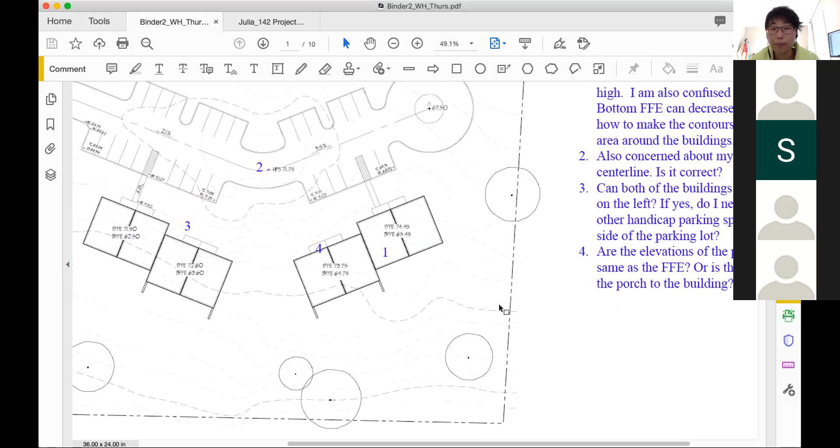Concerned that FFEs are too high, confused how bottom FFE. So yes, bottom FFE can decrease so much because you are going to use a retaining wall, right? I'm going to show here for everybody how the retaining wall works. I'll just use your numbers here, okay? Because some of them, yes, are a little too high and need adjustment, but let's just use that as a starting point. So in terms of the use of the retaining walls, you have a BFFE 65.45 here,

which means the elevation of this line is 65.45, and your next contour below is 65, right? So for all of our backyards, you need to maintain at least a 2% slope. So the 65 contour would be about 22.5 feet away. If we measure that distance, we will have 65 somewhere here. So that's your 65 contour there. And our original contour of 65 is this one. So that basically means we need to move that one up.

Now, of course, we don't have to use a retaining wall to move that one up, but if we don't want to move the whole length of the 65 contour, what we do is we add a retaining wall here, okay? And then we could simply only modify the last little bit of the 65 contour just so that water flows away from the retaining wall and doesn't drain onto the wall. Only modify where it attaches the wall. All the other contours would just attach the wall like this. So that is how you get through the 9-foot elevation change with a wall.

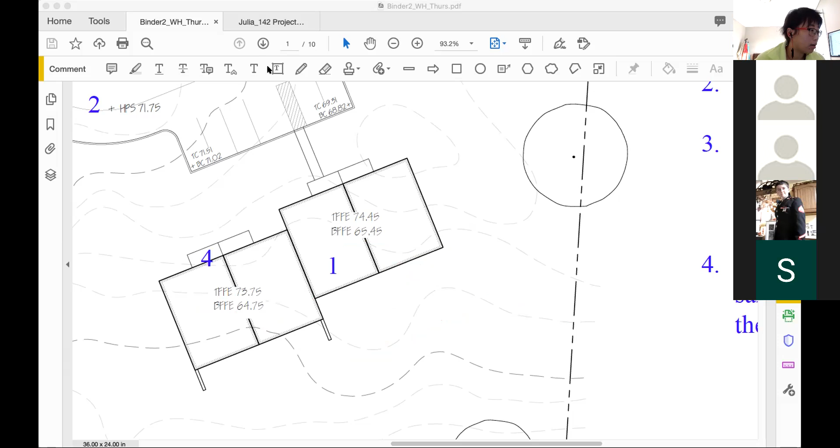So for this one, you would need to attach 66 to the wall for sure because the entire patio is less than 66. Without a wall, you wouldn't be able to attach that. Okay, so this is only if we're putting a patio on that unit. Yeah. Okay, got it, thank you. So that's how you work with the wall and the 9-foot difference. Let me zoom back out.

So, concern about your HPS. For your parking lot, there's really no HPS there because your parking lot has a crown. It doesn't have a swale. So this is not an HPS, it is basically just an HP. Your parking lot contours: I would recommend you go back to Tuesday's breakout room recording, the last item on the last module, weeks 12 to 16. So basically your contour pattern for a parking lot will look like that. That is your high point, and your slope goes like this, as you have calculated already.

Next question is, can both of the buildings with ramps be on the left? Definitely, and that's totally optional, up to you. Yes, feel free to move the painting. Basically, this is painting on the parking lot to indicate where the ADA parking spot is. So feel free to move it wherever you want it to be.

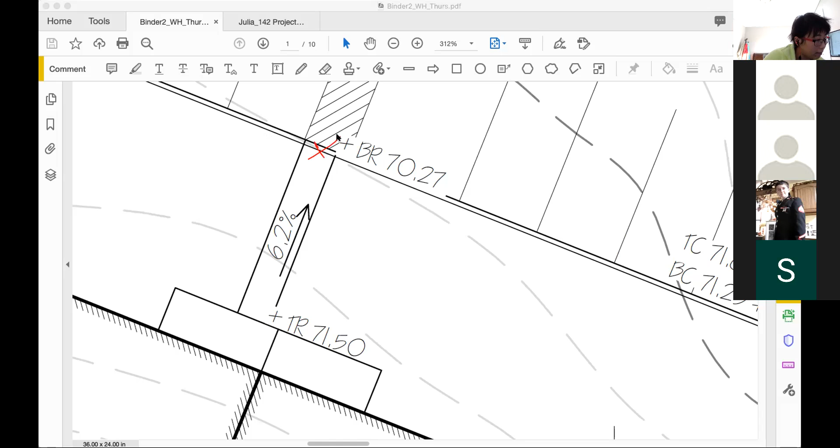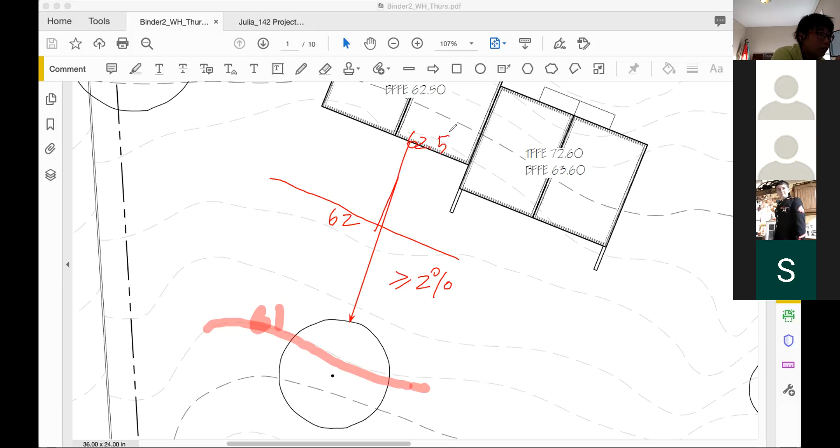Okay, so how do we check if your bottom FFE can work? So this one is 61 and it cannot be moved, right? And our goal is to maintain the whole slope above 2%. So basically this means about 50 feet away, it would be 62, and about 75 feet away, it would be about 62.5. So as long as the distance here does not exceed 75, then this option would work.

Okay, so for that one, your TFFE and BFFE could work, but as we explained how to use the retaining wall, the wall would need to be extended pretty long for your 62 to be attached up here. Does that kind of make sense? Yes, that makes sense. Thank you. Cool. So that's that set.

So I think the next step for you would be to work on the parking lot contours, figure out the V-shape, the angles, and where they hit the curbs. And wherever you have steps, you need to indicate that and calculate the walkway slope.

And actually for everyone, I would recommend having a sidewalk that connects all the way, instead of only one walkway to each unit. For instance, if I'm a visitor and I can't see the unit number on the door, and I walk here and find, oh, this is not the one that I want, I don't have to go back to the parking lot and then find the next unit, right? So for everyone, I would recommend having a connection between all the units, okay?

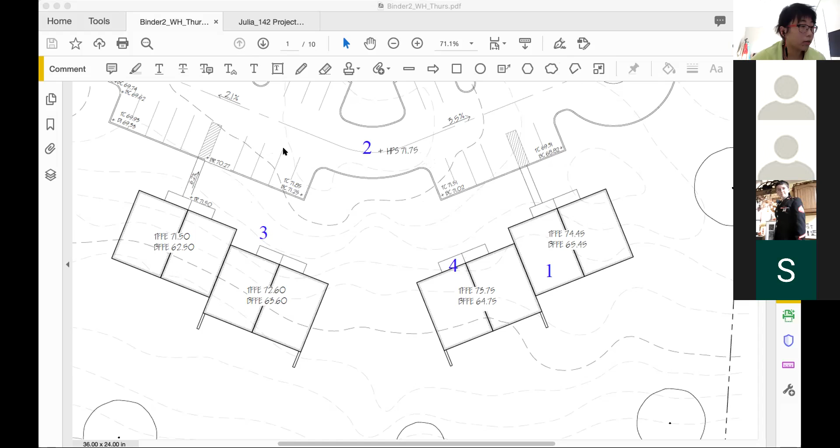Okay, let me try to go back to your list of questions. Anything else that you want to discuss here, Grace? I think that's fine for now. Like you said, I think I'm gonna listen to the other ones and look at the contours, but that was really helpful. I mostly was just concerned about those FFEs and how they worked. So that cleared that up for me.

So thank you. Awesome, cool. Alrighty, we'll move forward then. Thank you. You're welcome. Next one. I have my list on the other screen, so I need to pull it up. So I have Dana. Yes, I'm here. Hi.

So I know my questions are pretty generic. FFE is okay. Draw the proposed contours versus. So you have a 2%.

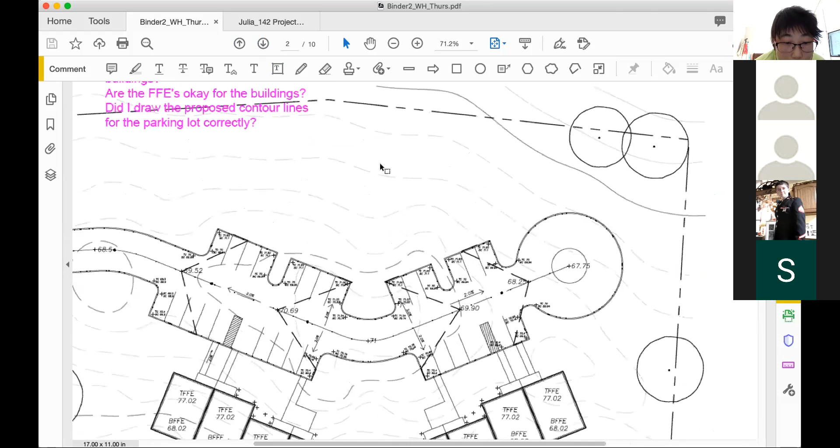Oh, okay. So you have a 2% slope for both your center line and your side slope, which means I think this line is correct. Okay, that one is correct. Different color, please. That looks like it's correct, because when you have the same centerline slope and side slope, you would have a 45-degree contour there.

Okay. So the bottom one does not look correct, because that's definitely less than 45. So be sure to check that. You should be able to mirror the other line if the other one is correct. Now mirror that one to get the next one. There are multiple ways. So I'm basically mirroring what I did on one side to the other side. So first you need to check whether that's 45 degrees. If that is 45 degrees, then you can mirror it.

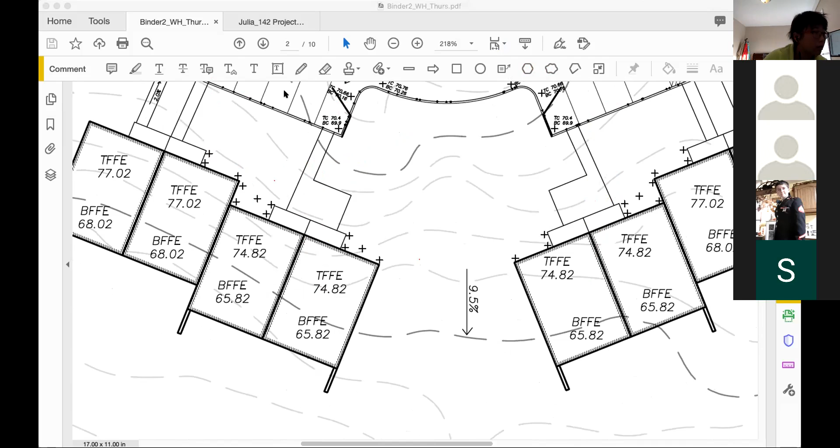So I know you want to check the FFEs, so let's take a look there. Because I was looking at other people's FFEs, and I'm not sure whether my numbers are too high or if I'm even doing it correctly. Yeah, some of them are too high. Because there is a limit of how many steps you can put in front of an apartment building, right? And there's a limit for the slope for the walkway. The walkway will be below 5% if it's not a ramp.

And the steps, the rule of thumb is not to put above 4 steps right in front of your porch for a residential building. But you can break it down to 2 or 3 steps a group, a flight, so that it doesn't seem a really steep entrance for the residential building. On the other hand, in many of these cases, you don't have to raise the FFE that high, right? So for instance, if we just take the number here, assume that this is correct. The 45 degrees seems to be correct there.

So I would say the top of the curb here is about 71. Is this 70? Yeah, 70 and 69. Or is that off? Let's see. I think you're probably missing 76. I am not quite sure if those are the contours because they kind of conflict with your spots there. So this is 71. That's 67.75. That may be 68. That may be 69. Still not correct. I think I may need to eyeball it.

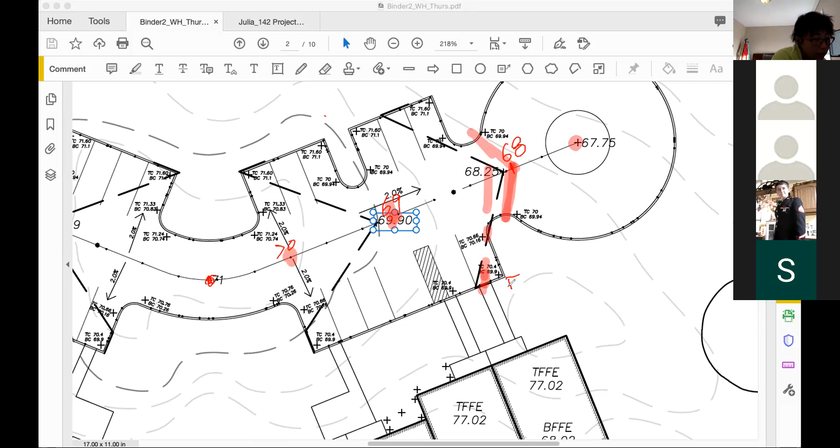So if that is the 68, this might be about 68.2. So if the BC here is about 68.2, and TC is 68.7, then what we do is we try to use 5% slope. And I remember this being about 17 feet away, so let's use 15 as an estimate. So the TFFE, without any steps, would only be 69 point something, which is not enough. But you can see without any steps, I can get to about 69.5 there. Right? So that is 8 feet difference.

You will need 16 steps, which is too many, not necessary. But would 69.5 work? Not really, because we have trees there. So 69.5 doesn't work either, meaning definitely we will need steps. But how low can we get there? So I want to keep some of the notes on the side for reference, but I'll erase some of them here. What we want to try to keep is this, right? And that is 63. So I need to keep 63, but I can move 64, right? I want to keep 2% in this back area.

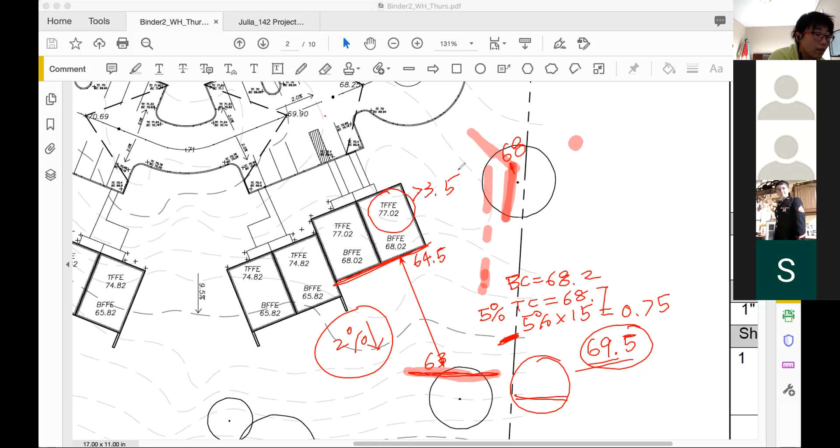Right. So for the front, I would want to aim for that. And if the difference, without any steps, is about 4 feet, then you would need about 8 steps there. That's a lot of steps. So the one thing is to measure the specific distance here and try to get this number as high as possible.

And the next one is, if you do need to put in 6 steps or more, break it down into multiple flights, and then it may not seem as steep. Yeah, so that's for this pair. I'll quickly go through a few others.

So the same thing: pick one of them between these two pairs to be ADA accessible without any steps, which means you would calculate the TC here or there. Measure the distance there and use a 5% slope to calculate what the TFFE is. Likely either one of these pairs would work without any steps, but you can calculate both to find out which one is easier.

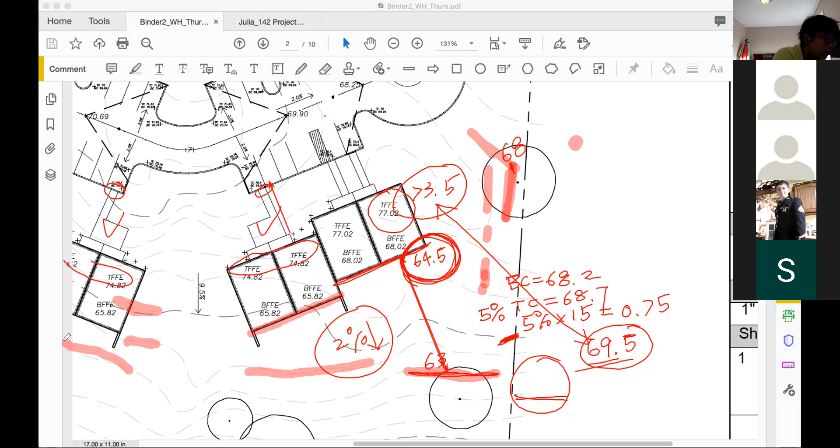And how do we evaluate that? For this unit, this is 64, so I'm trying to get this elevation at about 65. And for that one, this is 64 and that's 65, so I'm actually trying to get to 63 point something, or 64 would work, meaning that one can be lower than this one. So this is easier. The left one is easier to make ADA, so maybe you pick this one. I'm confident both will work, but you only need to make one of them work.

Let me try to clear this one and move to the left. The left one, again, is too high, but your goal is to try to get the bottom to around 64, because that's your 63. If you can get it around 64, then you don't have to move many of the contours. And for the front, you're aiming for 73, then you calculate the TC here, do a 5% slope, and then figure out how many steps you would need.

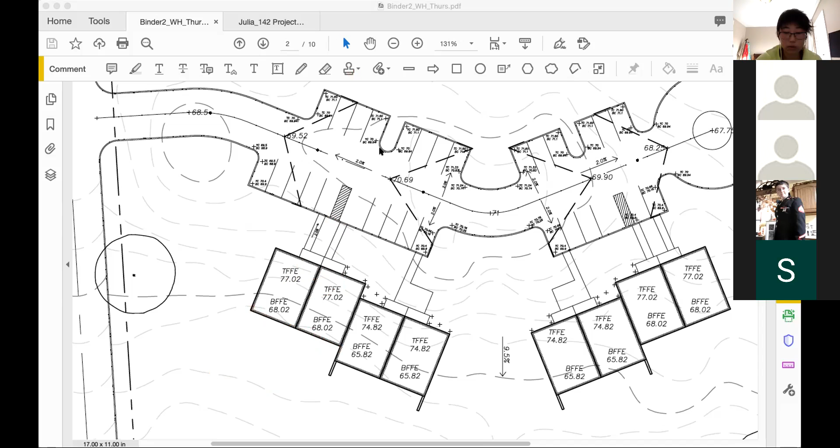Let's zoom out to the questions. Once we figure out the FFEs, one key thing to remember is that the contours keep going. I'm only drawing conceptually because I'm not sure if you would have a 67 there. You may not; that depends on your slope. But remember, they don't just stop here. They keep going. And then we would have two DIs there.

The importance of those contours is that they determine where the contours should be connected at the curb, right? So, for instance, if this one is 70, your 70 would come out here and do something like that. So those determine how you connect other contours beyond just those in your parking lot. Next step, you will need to figure out these connection points for your other contours, and I would recommend working on the front of the building first, then the sides, and then this area.

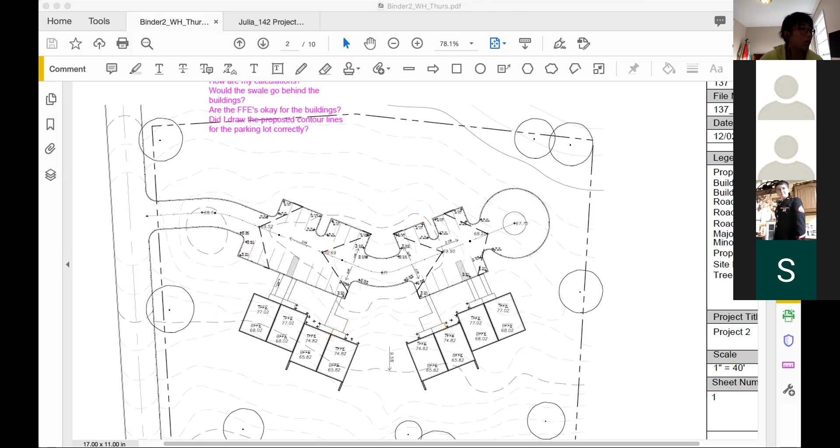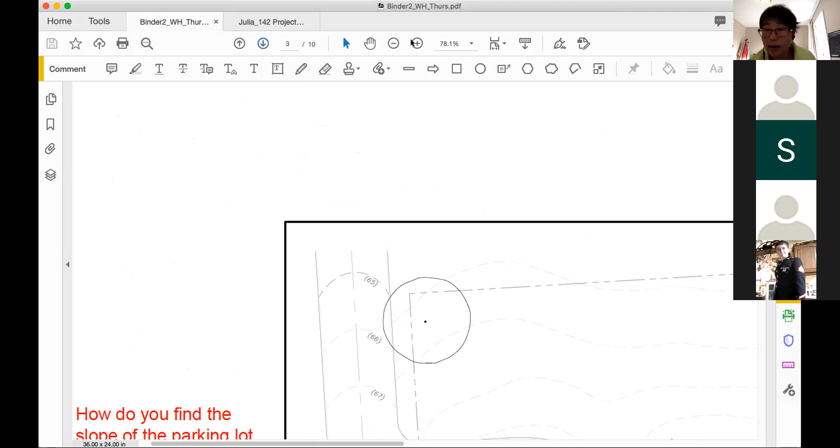Alrighty, we'll keep moving forward then. Next, remind me who I have. This is mine. Hi, Sophia. Pretty good on time then.

So the slope of the parking lot, you determine it, right? Because you are given two spots here and there, and you determine at what slope you want to go up and then go down. The slope goes that way because we're taking advantage of the original topography, where you have the highest point in the center. So you could predefine that as 2% and then use this one and this one to calculate the next one. Oh, okay.

So I think my biggest concern right now is I'm struggling with the FFE of the buildings. I didn't realize that each building should be the same. I was doing each unit differently, so I have to fix that. But are we determining the FFE based off the existing contours and where it should be, or are we going from the parking lot and working down?

Yeah, you need to go from the parking lot. Okay, so then I need to fix mine, because there's supposed to be a 9 feet drop between the top FFE and the bottom FFE. Yes. Okay, because I was worried that it was just a very big difference.

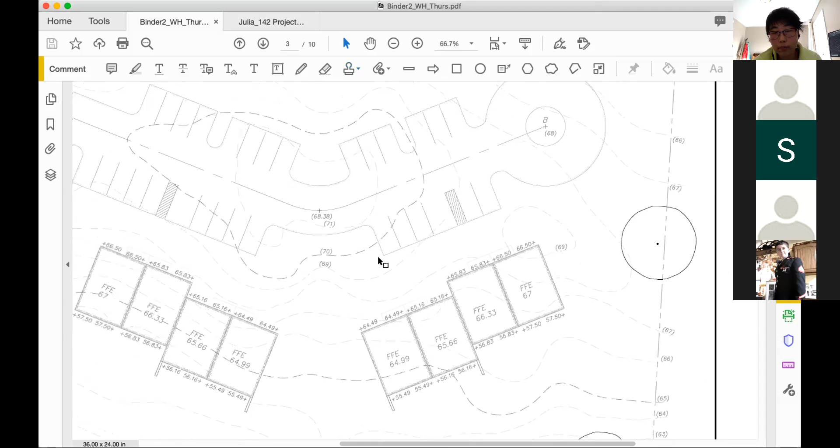So work on the contour draft and then calculate all the tangent points, the spots on your parking lot. Okay, so once I'm done with the contour, is that where I would start the spots, all the way on the left by point A? So your workflow would be: first determine the centerline slope, working from A to the right. Do not start with B, because this side will need to be steeper. It's a shorter distance.

So start from A, specify a centerline slope, calculate that slope, and then work on the parking lot's contours, what these contours look like. Then work on those spots using the contours you just drew. Then calculate these walkways corresponding to the yard elevations to check every set of BFFE and TFFE works, and mark your walkway slope and how many steps you need for each set, so that you know I do have 2 units that have ADA access, I do have walkouts.

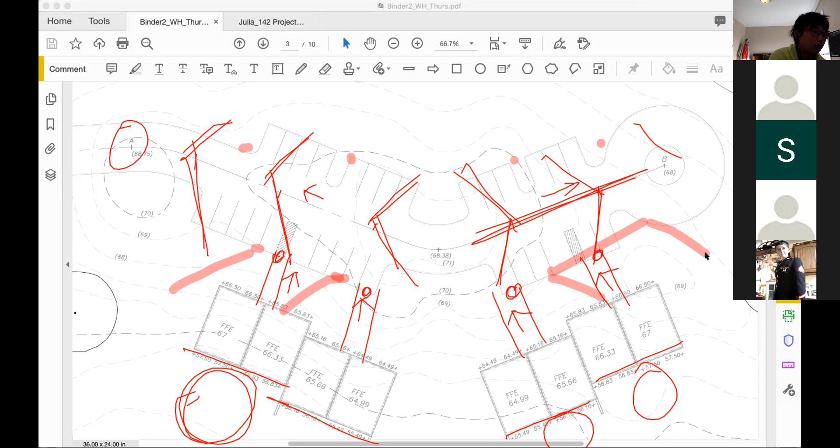Then go back to the contours. Where do they come out of the curb? Then start working on the other contours. How do they connect? Do I need a swale here or there? And then I think it's a good idea to work on spots for your retaining wall first.

And the last thing you do is calculate the curb spots. Every tangent point needs a spot, and that can wait until you finalize your contours. It's kind of independent of other things; it's only related to your parking lot contour. So whenever you feel really tired but have some time, you can work on that, because it's a very repetitive process. Okay. All right. Perfect.

Thank you so much. Yeah, this kind of applies to everybody. All right. Sounds good. And we'll move forward then.

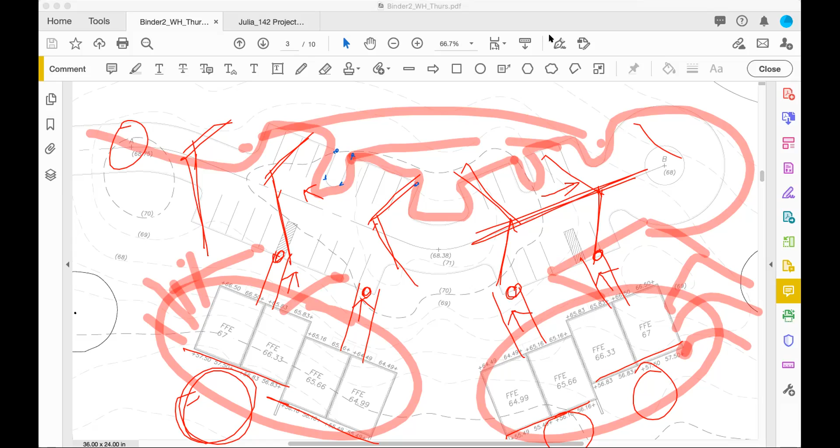Next we have Prahalad. You here? Hello. Hey, how are you? I'm doing all right. Doing all right.

Good to hear. I had some serious concerns about my main swale. Your main swale, meaning the one in front of your building? Correct. It's atrocious, and it's also very wrong. But I was just confused on how to do it, so I thought I'd just talk through it with you. Yeah, yeah. And then the other one I was really befuddled about was the wall that we talked about during the last review. Okay.

Seems like your TFFEs and BFFEs are mostly going to work. I'm a little confused on which one is ADA accessible. They seem pretty high. Okay, I should have labeled it. The one that is ADA accessible is supposed to be the one on the far left, but does that mean that the bottom floor FFE needs to be the same as the top floor FFE or something like that? No, I'm a little concerned that this is a little too high. You might not be able to do ADA accessibility there for the far left one. In terms of the percent grade?

No. So if I do a quick estimation, this is about 70.25 or something. So okay. Now the BC here would be 70.25. So the TC here would be 70.75. And this is about 25 feet, so we use 25, then 5%, you get 1.25. So the highest that you can get here would be 72. So I think you still need one step there. And you can do the calculation again, but I think it is safe to say that this is a little too high here. Okay.

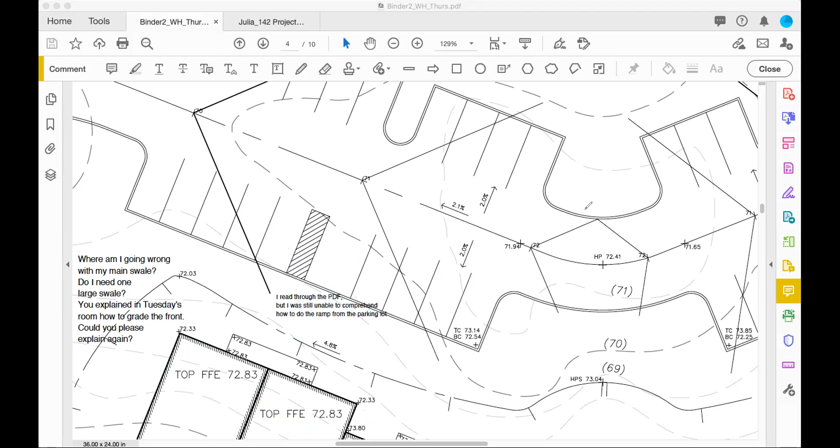And if it is 72, you have to get 63, which still can work, but 61 here, sorry, I'm just trying to go 61, 62, you have 63.33, so that still might work. When you say might work, what would be the problem with it? Is it because I'd have to change the landform there, or something else? So you have to maintain 61 here, right? Yes. And we calculated that the front without any steps is about 72. So the bottom is 63 there. In order to not move 61, if this is 100 feet, then we're not moving 61. But if this is larger than 100 feet, then you have a slope that's less than 2%, then that's an issue.

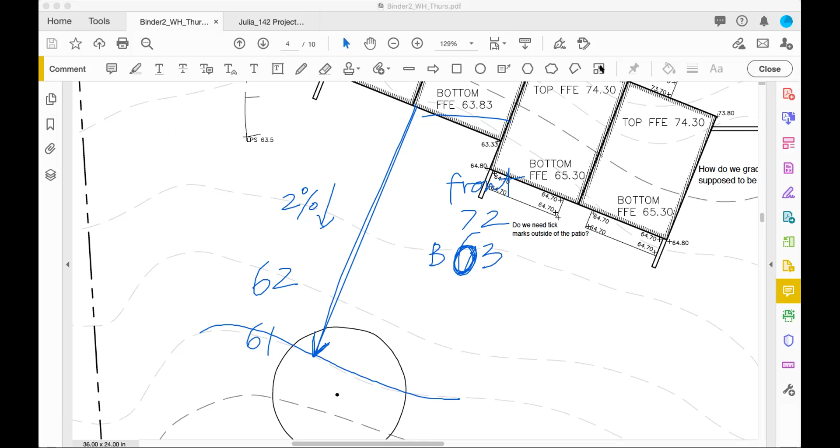Let me quickly measure if that's actually larger than 100 feet. So distance from this one to the unit here, it's 70. So if it's 70 feet, then you would be able to have a bottom FFE at 63. So you can still make this work, but you'll end up with a long wall. That kind of make sense? With a long retaining wall on the side of it. Yes. Okay. So in order to make this ADA accessible, you need to do some fine calculation about the front walkway, make it at maximum 5% slope, and then get a sense of how your TFFE turns out.

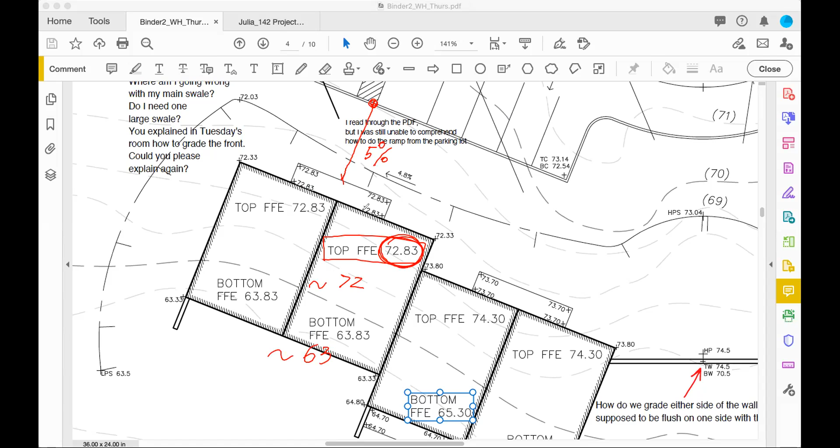Okay, so let me go through that once again. You need to calculate the TC here at 5% slope. Then you would know my top FFE, the more precise number. My suspicion is that it will be below this, but not too much. I think it will be around 72. So your bottom would be around 63. Now, if the bottom is about 63, what you need to do is measure.

So we need to keep 61 in place, right? Then we measure 50 feet here. That is our 62 modified. That's our 62 contour. And this is at a 2% grade, because this area needs to drain. All right. So then that means this whole area would be slightly above 62, right? Right. I'm sorry, this might sound like a dumb question, but why would I need to regrade the landform there? Because otherwise you're keeping 61. The 62 cannot be here.

Let's measure. I'm sorry. Like, I understand that I need to maintain the 61 contour. 50 feet. Okay. So I'm measuring. Okay, that's 50 feet. Sorry, I take it back. I need to wake up also this morning. Not this way, the other way around.

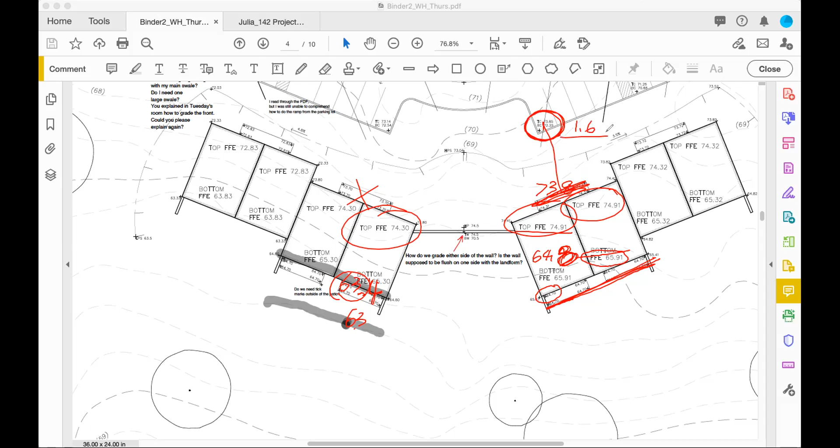I'm a little skeptical with this. It seems that you added 1.6 to your TC. I think there's an error here as well, because you wouldn't get so much. Instead of adding 0.6, I must have screwed up there. Okay, I gotta go back. Yeah, you actually add 0.5. It's 6 inches, but it's half a foot. Right. So check one more time for all these numbers. I think you know the process. It's just a matter of double checking your previous calculations were correct.

Okay. Let's try to hit the swale issue. Last class session, I explained to the class in my group there are 3 options for grading your building. The first option is the easiest option. I'm drawing conceptually, okay? I know that these contours kind of connect from midway along the curb.

So for instance, the 70 would go like this. And the first option is for all the water from the building to drain to the parking lot. Right, and okay. So your wall would be there actually, connecting the, otherwise it's hard to drain that corner, okay? So this is the first option.

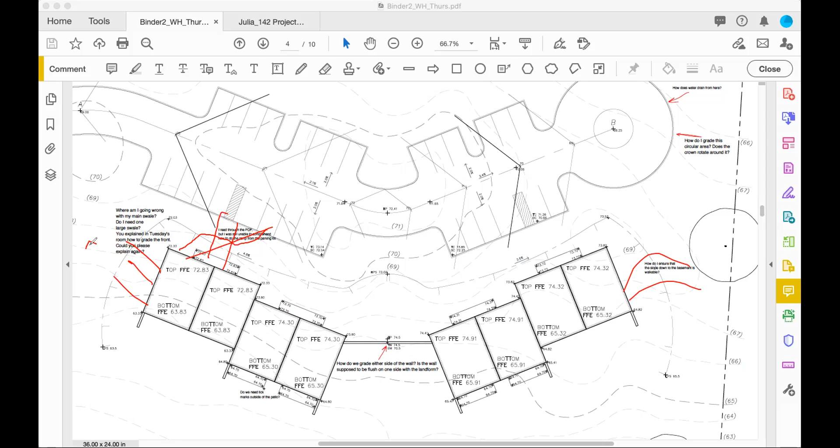And then the second thing is likely you'll need a swale here, but not here. Likely you'll be able to drain the water here with just sheet flow, and yes, you will need a swale here because of the number of contours that you need to adjust here, and also the original direction of this contour there. It's hard. You can't just turn them away like this. You don't have that length of the wall to work with. So those are the 3 difficulties for the first option. Okay. All right.

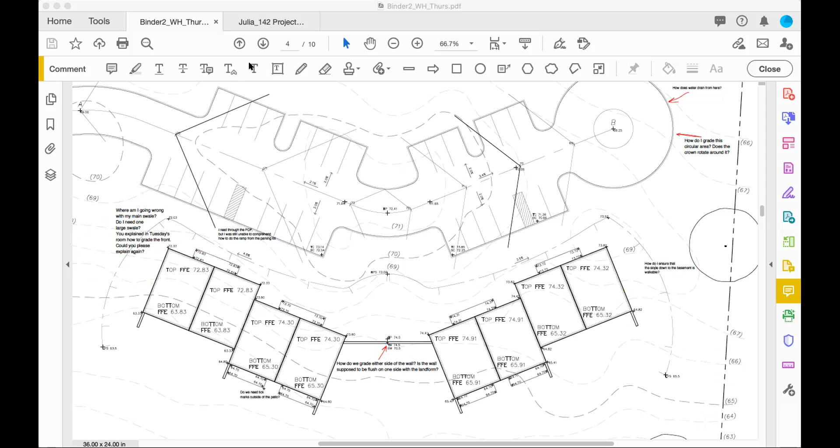I see you have a few additional ones. I'll go very quickly. Sorry. Thank you so much for going in depth. Oh, no worries. This will benefit everybody, and I believe we have about a couple minutes here.

So how do we grade? You continue. The shape of this should not affect how you grade that. Pretend that there's no shape and just keep going. And that circle just represents that we should put a drainage inlet there? Yes, you should. So we keep the contour pattern going, and the lowest point here would be our DI. You need to find wherever the furthest distance is, and those 2 spots are the lowest points where the water will eventually collect. So those are the DIs.

And don't forget that you need to grade the road on that side too. But basically, that's just 2 contours or 1 contour depending on your elevation. Can you scroll over to that side? Because I swear I had put in some crowns on that side. Oh yeah, you got it. So I still need to regrade that, or? Well, if you made sure this is correct, then right.

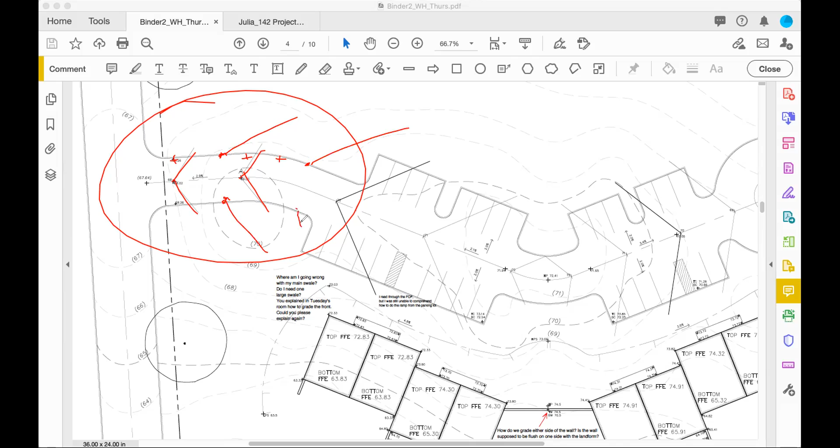And then finally, just one last thing I had a question about. I think it was on the other side of the document. Oh no, actually, it was at the bottom. With the patio, do we need to put some tick marks? You don't, unless you have steps or walls around the patio. Otherwise, this is the same. These two spots are the same.

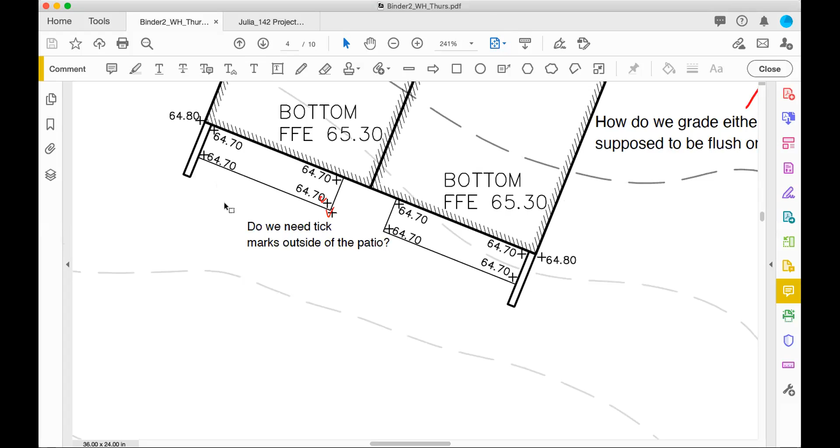Okay. Sorry, that was just the last thing. Thank you so much. No worries. And if there's any extra time at the end, I probably have a couple more questions. Sure, that's totally fine. Do I look like I'm on track to finish this by Sunday? Depends on how much time you can put in. All right, thank you. Keep powering through. Let me take a 1-minute break and I'll be right back. Need to get a sip of water. Okay.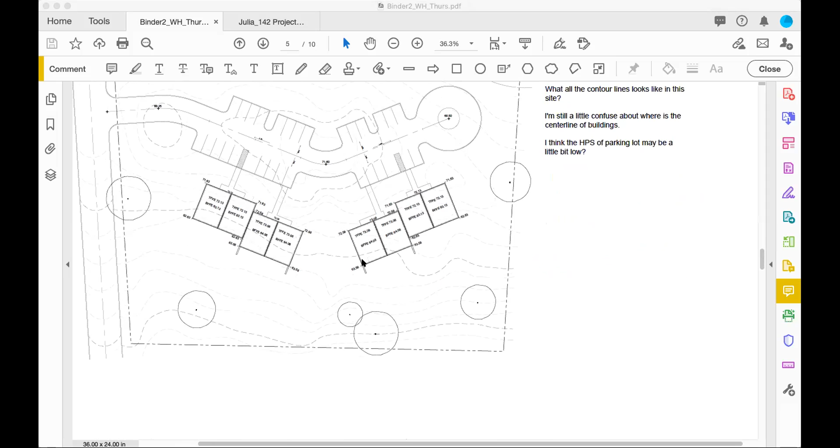So where should we start? I think we can go over the parking lot contours. Well, the parking lot contours is a crown. It's a V-shaped pattern to create the crown, right? So you may have viewed other people's critique and get a sense of it. Let me reactivate my pencil here. So basically, your parking lot contours will look like this. Of course, that's not the only way to grade it, especially for this one. But let's just go with that as a starting point.

I think your main question is probably related to what's the contour pattern here? Is that kind of where you're confused? Yeah, actually, after I finished watching the review before, I already got the answer because you guys gave a lot of examples of those contours, what it looks like. Awesome. Cool.

Yeah, so I do agree you can raise this up a little bit more to make it easier to create the ADA spots. Because with this high point, it's pretty hard to get to 73 and 72 and 73 here. Can you kind of see that? If I'm high here, then I will be higher at the spot, then I can get higher here, right? So yes, I know you started with a 2% slope, but raising that could make it easier for you to raise the top FFE of this unit.

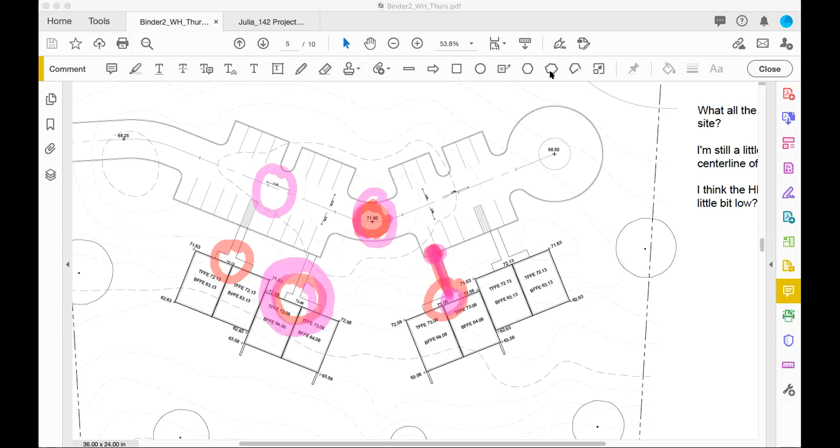I'm not suggesting that you have to do that, but one good check would be, sorry, let me zoom in here. So I don't see a spot marked up here. I'm not sure what the spot here is. One good check would be if this is 71. Let's suppose that that's 71. I could now estimate the top of the curb is likely around 71 as well. Then you need to measure the distance here. That's about 25 foot. I think it's 27 foot. If we use 25 and 5%, we know that you are able to get to 72.25 there without any steps.

So if this is 63 at the back, 5, 4, 3, this should still work for the back. So a good check like this would help you determine, do I need to modify this at all? It looks like it's fine if you don't modify it. So I would actually go with the current numbers that you have. But again, double check how many steps you need. What's the slope here? Is there a better solution? But don't spend too much time at this stage. Move forward to draw out your parking lot contours, to start the contour patterns in other areas.

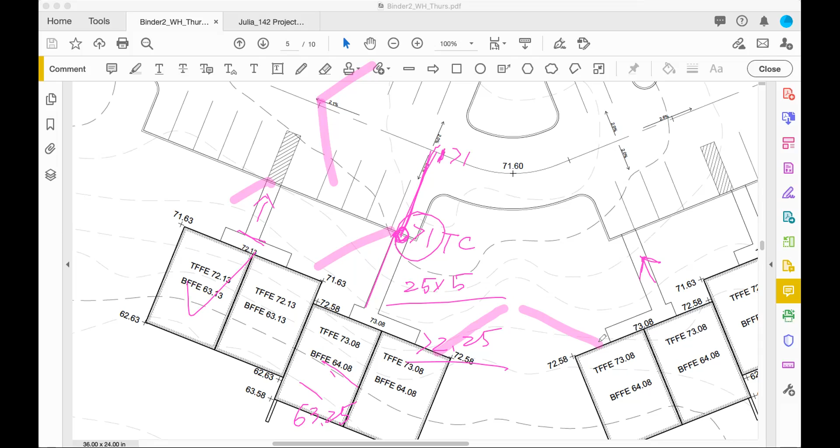It's more important to move forward to the next stage than to refine the TFFE and come up with the best solution. I would not give advice like that otherwise. If we were 4 weeks away, for instance, I would help you get a better set of FFE that will reduce the cut and fill. But I think at this stage, it's better to move forward with the other contours. Does that make sense?

Yeah, I will. Firstly, I just have to finish all the contour lines work and then maybe set the HPs of the center line of the parking lot higher, just to make sure that I have enough space to deal with the slope and the distance between the building and the parking lot site. Yeah. So what I was trying to get at is do one more verification based on your current HP. Calculate the TC here, and calculate without any steps what kind of TFFE you can get here, and make sure the bottom FFE would work with the contours at the back.

If that works, don't change it. Move forward. Move forward to sketching out the contours on the parking lot, and then calculate those spots, calculate the slopes, and calculate how many steps you might need for other units. And then once you verified every one of the units would work without moving the trees, without reducing your ADA or walkouts, if they work, move forward with the other contours.

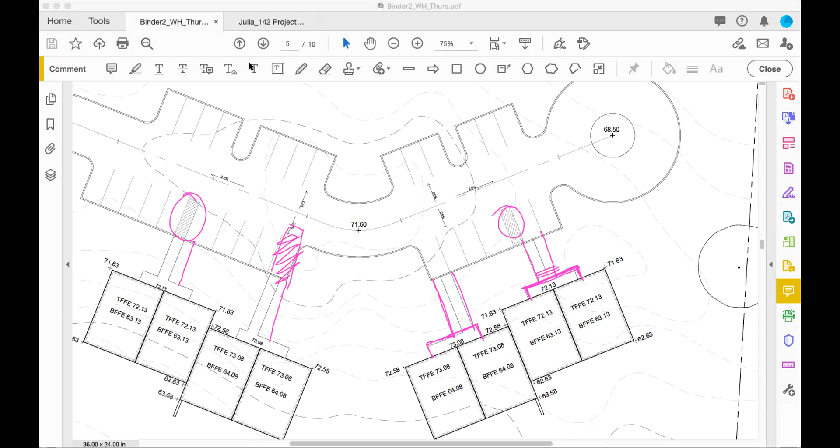Okay. What else? Let me zoom back out and see your list here. Okay, I think that's all for your current questions. If you come up with more, if we have time at the end, we can definitely talk more about this. Anything else that you want to touch? I know we have a couple more minutes here. I think just let me finish the review today, and then let's see if I still have some questions. Maybe we can talk. Sounds good. Thank you, Professor.

All right, and we have David next. How are you doing? Hey, hi. Pretty good. How about yourself? Can't complain too much. Awesome. You had all the questions answered then.

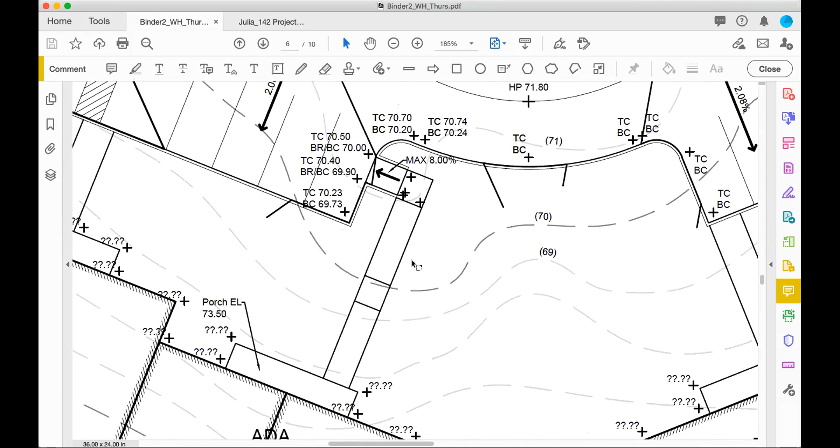I think the only one remaining would be that ADA curb break. Just want to make sure that roughly it's correct. All right. So if you have BR, oh, okay, I know why you had that. So the spots. So maximum 8% going up. 74. So that needs steps. Steps. ADA.

Is it mainly you would like to check all these spots for the BR? No, just graphically, is that how you do a curb break? Oh, graphically your current representation works. Your TR will be here. Sweet. In terms of design, as I suggested to other people, I think it is a better design if you have connections between every one of them.

I know we kind of missed the ADA lecture this semester. Usually we would have a separate week that's dedicated to ADA design. I hope we'll be able to bring that back next semester for the stormwater class. But the one key thing is that ADA is not just for ADA. ADA is for everybody. If you have a baby, you need to push a stroller, right? If you have heavy things that you need to unload, you also need a ramp. So whenever you can make the ADA accessible to everybody, that would be the better design.

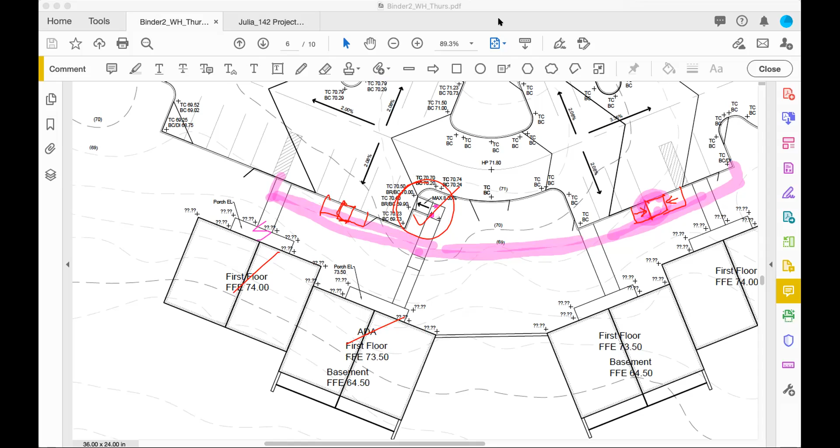And then the only other question that I have is, in lectures you supplied roughly how things would look graphically in AutoCAD, with spot elevations and such. Is that something you could supply for the curb breaks as well? Oh, graphically. That makes sense. Yeah, like in AutoCAD. There is one. Sure, I will look for a couple examples and I'll put them up on Canvas.

Sweet, thank you. But because you opted for basically one without any side slopes, for yours it is really just any contours that would run on that ramp, the slope arrow, and the TR and the BR. So for yours, once you add those TR there, you're good to go. Sweet. Sounds good. Thank you. Cool. Alrighty. That was quick.

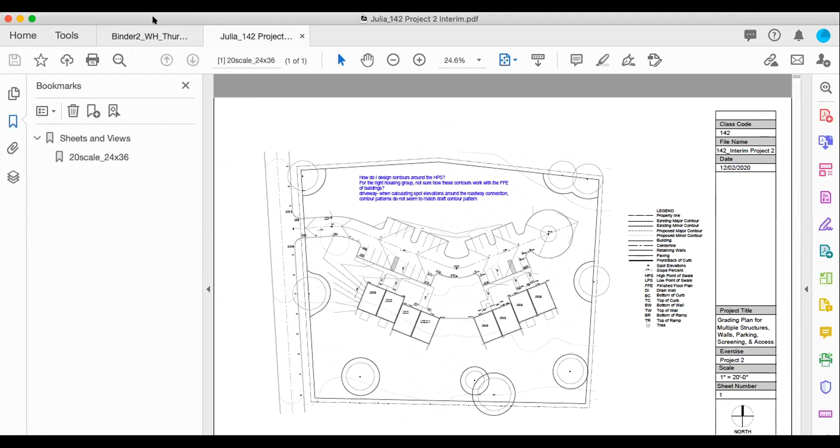Yes. Okay. How do I design the contours around the HPS? I'm not sure, for the right housing group, how these contours work with the FFEs, driveway, calculating spots around the road connection. Yeah, you don't need to include that one. Stuart included an example. So basically you're doing something like this. But you don't need to provide any fine grading for that area for this year. Next semester we may bring that back, but not for now.

So can you explain a little bit more what you meant about around the HPS? Do you mean this area he was talking about on Tuesday? Yeah. Looks to me that's correct. Okay. Yeah, you're basically having a very small summit signature there, which is correct. Yeah. So next one is about contours.

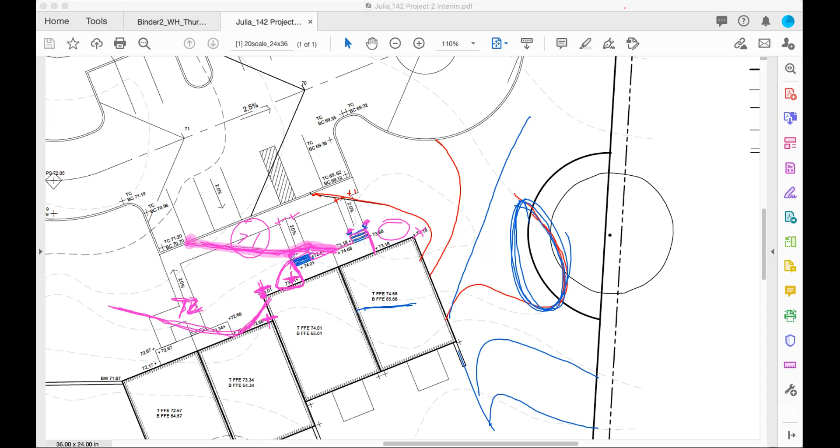So for instance, this one will be above 72. That one will be slightly below 72. And that one would be below 72. The 71 point, no, it would be higher than this general area. So 71.3 or 4, all would be pretty reasonable estimates for those areas. Okay. Yeah, great question for that area.

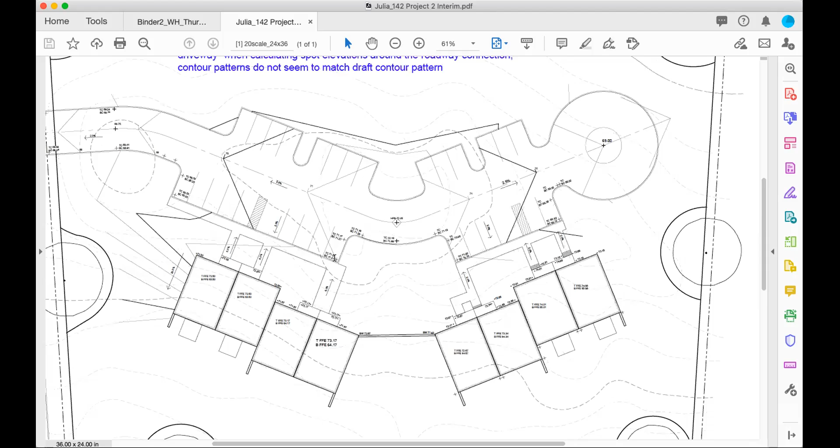Take a look at the other things. I think we hit those questions there. So for this side, I think what we can do is something like this. Once you calculated these spots and determine where this contour will fall, now it depends on whether or not it falls on this wall or that wall. Basically I'm trying to say it could hit the front of the building, but that would be dependent on once you calculated the walkway spots there.

Okay. It is even possible, if that connection is correct, that you can turn that to make this area a little steeper. That's fine. If you want to create some more room for the side, you can see if I have that contour hit this wall instead, I would have a little more room to attach all the other contours. Okay, so that's some flexibility at that corner.

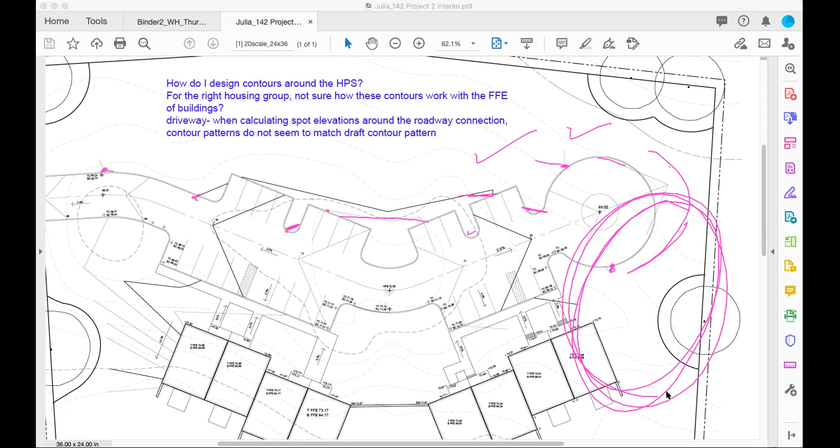Well, let's use the rest of the time to go over how to do this area. So the first thing you need to do is to know the TC and the BC at the end of the lowest point here. What's the curb elevation around that? So that's 68. The BC would be a little higher than 68, right? Let's say 68.2 maybe. And the TC here would be 68.7, which means your next contour out of the curb.

So if we're drawing this, we're going down, right? We're going down, and my BC here is 68.2. And then I have a curb that is 0.5. So my TC here is 68.7 there. So I would have a contour that is 68. My next contour here would be 68, somewhere here.

I'm actually, yeah, I'm only drawing, it's actually like this. I'm running out of space, but I have a 68 somewhere. I'm exaggerating the slope here. Sorry, is that kind of clear? I know that might be confusing. I'm exaggerating the slope in this area to show that my next contour is actually 68 somewhere here. Or maybe it's better that I redraw it. Okay, let's redo it.

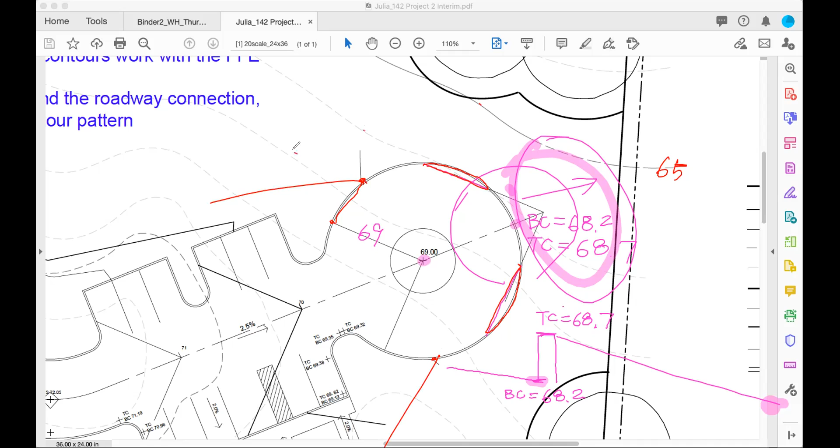68 is actually up. Okay, so it has to attach the wall. This one is 65. So I have a 69 here, 9 here. That connects back there. 9 connects to the building in this area. I have a 69 somewhere, 5, 6, 7, 8. 68 will come wrapping around and then hit the building sidewall.

7, 6. I need to make sure I have enough space here. Okay, you need to double check that I have enough space to not move the 65. Of course, I can move a little bit. I'm not in the tree area yet. Okay, so that's my 68.

Can someone give me a good to indicate that all this actually made sense? It makes sense. Cool, good. Awesome. So that's how you figure out what's the next contour off the curb of the drop off.

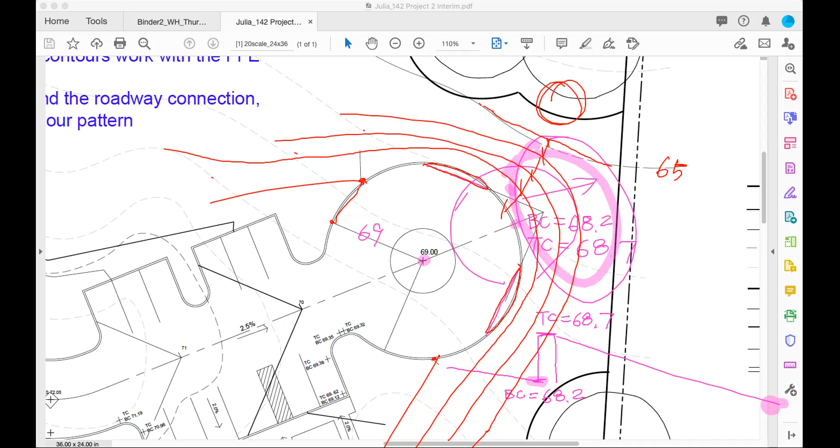Alrighty. Anything else, Julia, here? I don't think so. Awesome. Okay, we'll move forward, and if we have more, we'll come back if we have time later. Okay. Thank you. So we have Lena. Is this your drawing, Lena? Yeah, this one's mine. Okay, cool.

So FFE question, drainage on the pavement and the swale, the center line. Yeah, we went through the center line with Prahalad, I think. How do I make the sidewalk? What do I do with the area between the two complexes? I think we went through that with the 3 alternatives for grading the whole thing. Why are the house lines so thick? That's a CAD question.

Not sure if you use the most updated base map, but be sure to adjust the CTB file. Actually, all those are fair game if you don't want to basically just follow the CTB that's created. If you think you have a better hierarchy, go for it. So where should we start? Let's take a look at what you have right now, okay?

So you have a centerline slope of 3% and about 4%. You have some of the parking lot contours. You had top and bottom FFEs. Looks like some of them are pretty good numbers to work with. You still need to work on the left units there. Let's check one of the pairs, okay, to make sure that they work pretty well.

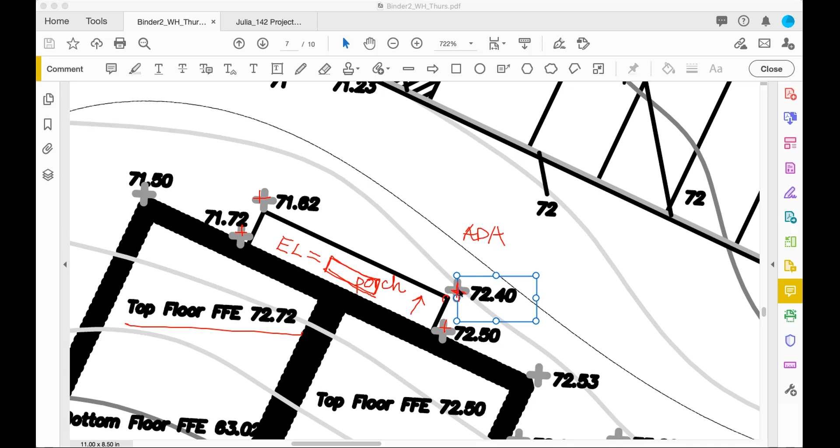For instance, here, if you don't have any steps, then you need to create a 2% slope. If you have steps, then you don't need to create that 2% slope. I think this is a little confusing, but if you have steps, the principle is to make the ground drain, right? Because the porch is elevated. The ground needs to drain, needs to have a relationship to create positive drainage out.

If you don't have steps, those are basically seamlessly connected to your ground. So that's why for those spots you don't need double anymore, because the ground is the same as the porch. In this case, these spots need to vary to create the positive drainage. So different treatment for ADA accessible ones and those with stairs in front of them. That's what we need to clear up a little bit. And then if this is your ADA accessible, make them the same FFEs because this is one pair.

Now, varying them will create difficulty to connect them with a common sidewalk. Making them the same will be much easier to design the sidewalk, that's the walkway that's leading to both units. And there cannot be a big difference between the TFFE, I mean, there cannot be steps between the TFFE and the elevation of your porch. Okay, so my suggestion is actually, make this one ADA. The next one is easier to create ADA accessible units.

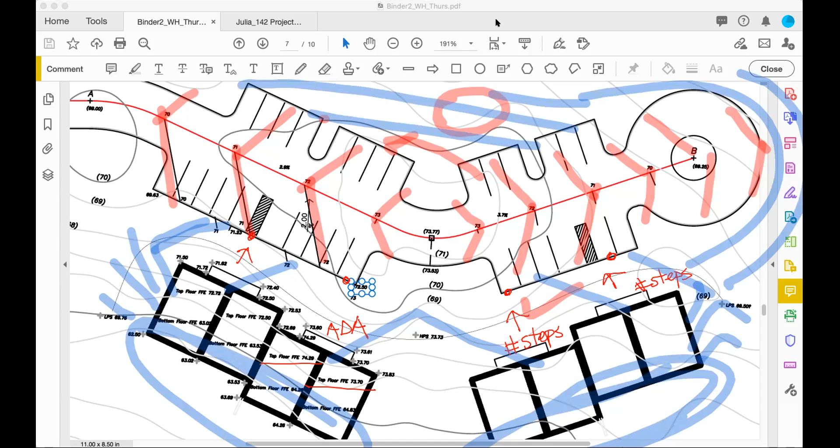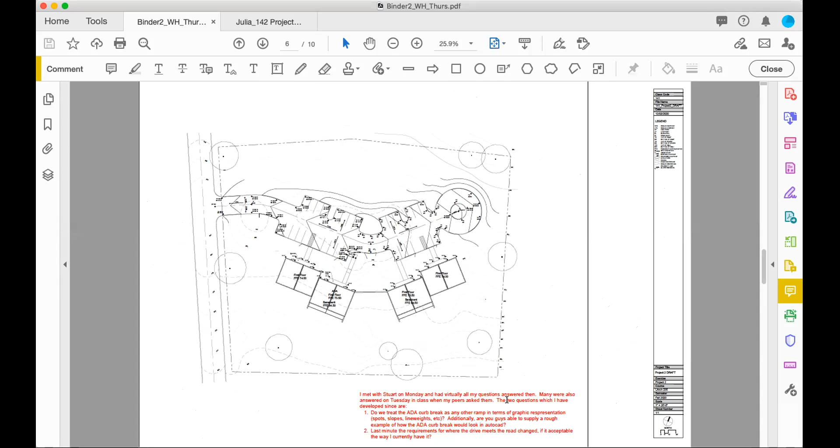Oopsie, my iPad. Give me a second. Load the screen. Okay. The rest of your questions is about this one.

I think number 4 is about how to design the sidewalks. Now, as I recommended to others, I would recommend doing the sidewalk with a connection to the middle. Now you can enlarge this one a little bit so that you have more space, but having a continuous sidewalk in front of all the units. So that's the design of it. The grading of it would be determined by your TFFEs and BFFEs, at what slope they are at. Okay.

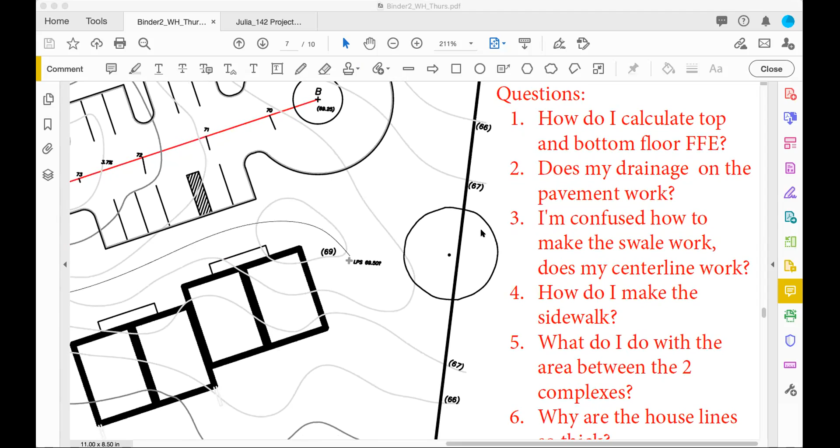Go back to the list of the questions. Yeah, I just want to quickly offer some thoughts on generally what's the approach. So Lena, I don't know if you stayed for the whole session. Some of the other ones I did explain with other students. Do you need me to clarify anything additional? No, that was really helpful. Thank you. Cool. So start with these units first. Modify this one without one step, and then move forward with the contours. Okay, got it. Thank you. Okay, cool.

Okay. I have Stephanie as my next. Stephanie, are you here? Yeah, hi. Hi.

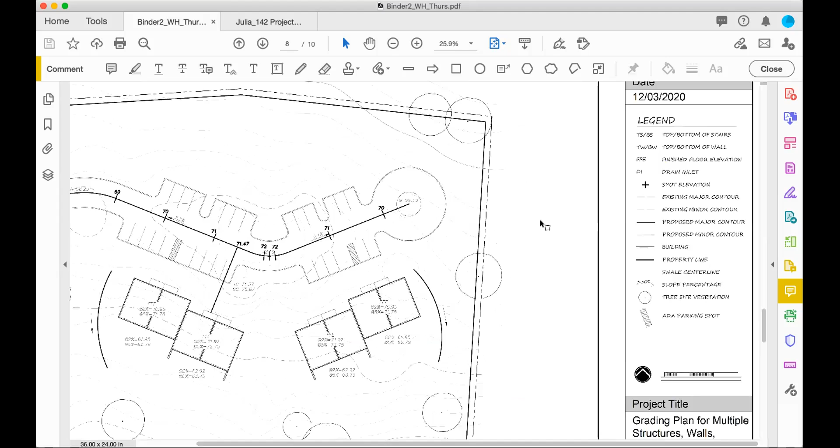Okay. What happened to the water at the center between? Should there be? So, did you catch the three options in the center between the townhouses? Was that in the last class? I think I remember. Yes. And then the next option would be having a swale here, 2 leading into the 1. Yeah, that leads to one swale. So those are the two options for the middle of the townhomes. Do you need me to explain a little more on that? What is the dark blue one? The dark blue one. Yeah.

So two options for the area in between. The first option is to have all the water in front of the townhomes drain to your parking lot. So that's the blue option. And then you have a wall in between, and then you have everything draining in the opposite direction on the other side. So that's the first option. The next option is for part of the water to drain there and part of the water to drain here with a swale. It will be sort of like a bunny ears shape. Your high point will be there, and then it will kind of converge to one. So this way you don't have a wall that blocks everything from front to the back.

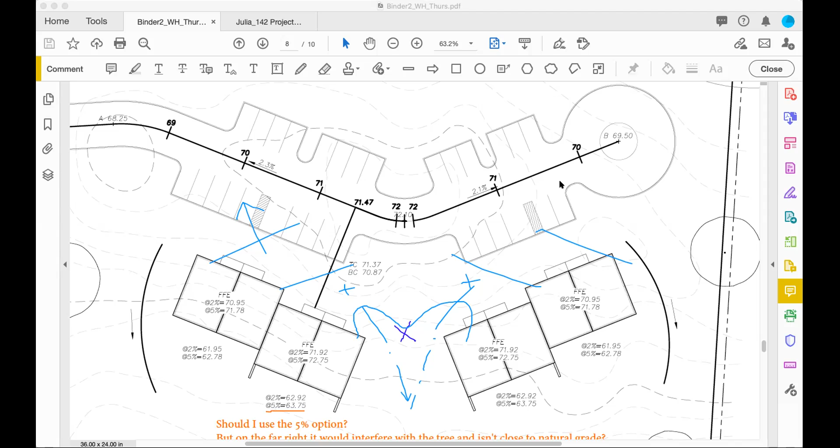Right. So next, everything. Give me a second. It's not cooperating.

Should I use the 5% option, but on the far right, would it interfere with the tree? So it's really a case by case evaluation whether you use a 2% or a 5%. For the far right one, I'll definitely recommend 5% because you have the lowest front and the highest back for this unit. And you need as much slope as you can get to reduce the number of steps in front of this unit. Right? The 62.78 is very low.

So the second one, the 5% will give you 63.75. It's actually pretty good because the 63 is over here. Sorry, your 63 original contour is over here. So if you can get this to 63 point something, you don't have to move 63 for that pair. So I would say it's somewhere close to 5%. You don't have to use exactly 5. But 5% will work better than 2% on this one. Yeah.

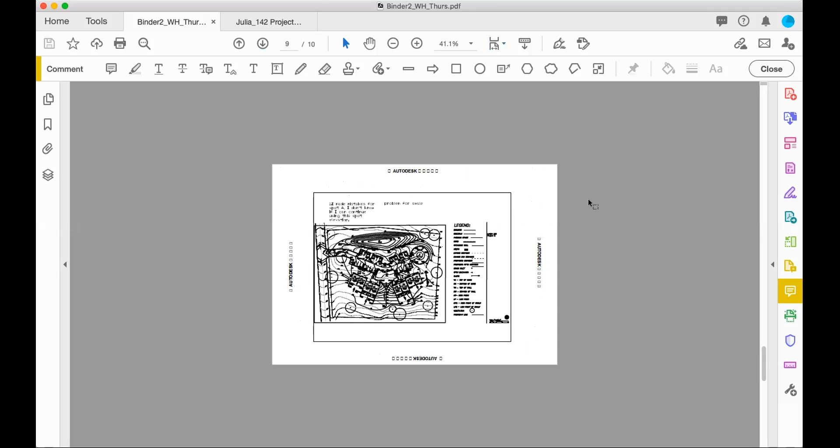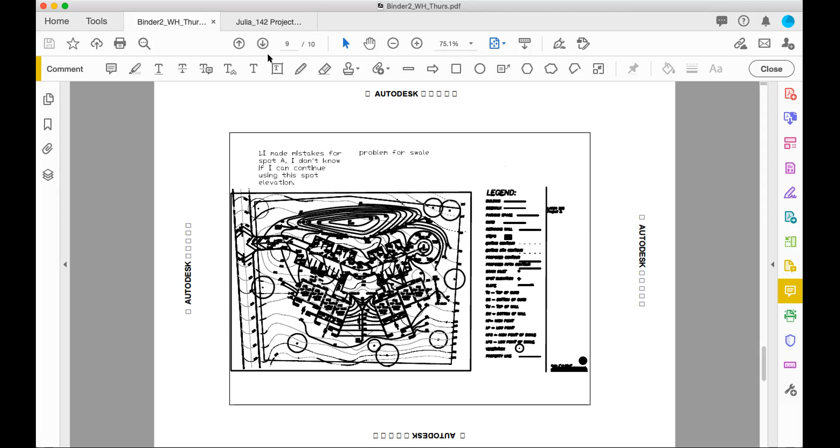So what's the next one? Oh, that's Kristen's. So Shen, I don't know if you uploaded a second version. Are you here, Shen? Okay, Shen is not here, so I'm going to go ahead reviewing Kristen's. Okay, Kristen? Yep. Awesome.

Should the walkway length include the stairs? That's a good question. You can grade your stairs, your tread, with a 2% slope. So definitely over the tread, if you design your entire walkway at 5%, that distance would not have a 5% slope. Okay, so I should stop the length of the walkway at the stairs. Yes. But do remember that you could have a 2% slope along this because you can have a sloped tread. You should have a sloped tread.

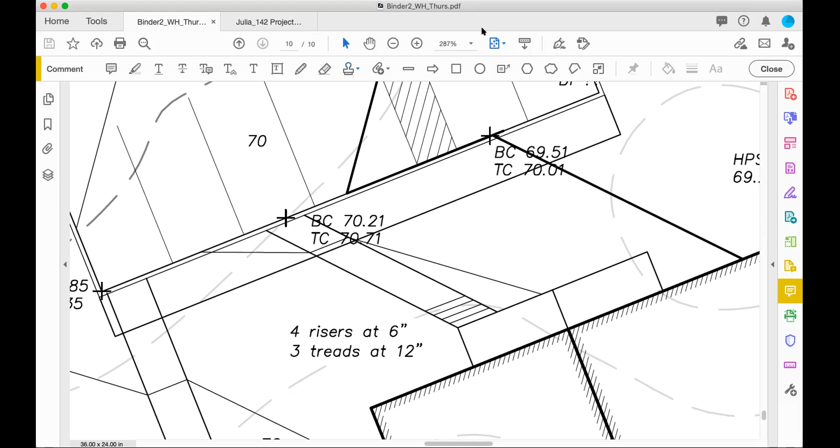Okay. And another question, sorry, I've been working, so some of my questions aren't super relevant. Oh, no worries. Once we add this walkway, does that also subtract from the walkway length? I mean the sidewalk right outside the parking lot. Not really. Yes, I agree this would have a gentler slope; if this is a 5% slope, you might not desire 5% in this direction for the whole thing. Yeah, because all of mine are 5. Right. So it needs to be reduced for that part.

Okay. So does it just need to be reduced to 2%? Yeah, 2 would be good. I would not recommend going higher than 2 for the side slope. And if you're adding the connection walkway in the center, I'm curious if that would change my 72 contour there. Not necessarily. The middle area right now is pretty gentle, so I wouldn't think it would change your 72 contour too much. Okay, cool.

Another question. I wanted to make the ADA accessible one, the one on the left on the screen right now, that hooks right up to the space. I wasn't sure how to grade that because I just had it 5% all the way. But do we really need the connection in the middle, or is that just recommended? You mean this area? Yeah, the continuing walkway. It's recommended. You don't necessarily have to have it. I don't think it will change your design of this walkway much though.

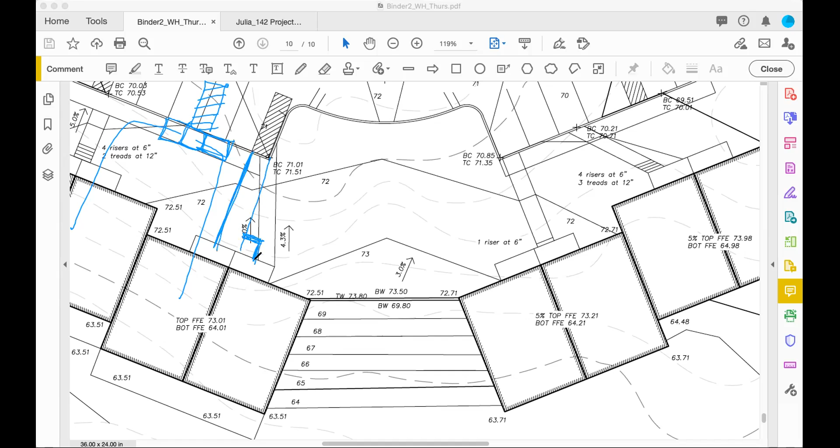So I know you're trying to get a longer one. In this case, because you're not lengthening the sidewalk a whole lot more, I would suggest we not do that and just go directly with this design. Maybe enlarge it a bit here. I know this will lower this down, but comparing a steeper slope in this area, because you need to walk this way and get into this, I would opt for making the back a little steeper. Move some contours in the back to make this work. The trees are pretty far away, so I think that's a better design.

Okay. I'm just unsure what would happen to my 73 contour if that lowers below 73, because I have that peak in the middle and the wall designed based off of that. So I was hesitant to lower that under 73. So your 73 would be here then.

Oh, okay. You have a 4.3% slope there anyway, right? I can make this a lot gentler. I can make it 2% or something. Oh, that was for the walkway, but yeah, I need to figure out the slopes in the center still. Right. Yeah. You can definitely move your 73 over to this area. Just a little bit of 73. So the 73 on the right end though would actually touch that building, the other building, just not the one on the left.

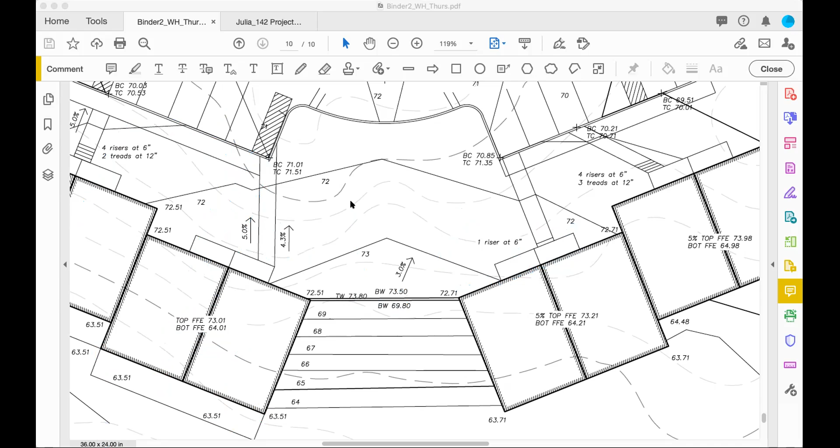Oh, I actually remembered one. For the walls, is the bottom of the wall the same as the spot elevation or the BFFE then? Bottom of the wall for this one, if you have a wall here, this one would be the BFFE. That one would be lower than that, at the edge of the patio, right? No, you would estimate. Now you're in the lawn area. You would estimate based on the closest contour, and that one is actually based on whatever the contour here is.

Okay. So for like the wall in the center. Let's go to the center here. So that would be determined by the ground, right? So that's the ground, not the finished floor elevation. No, those do not have a direct relationship with your top FFE. It's determined by the ground. Got it. And then same thing for the wall all the way over on the left. Yes, that corner. Same thing. Cool. So I got that one. And then for the walkways, they're 2% and then coming off. Okay, I think that answers that. And then the other ones.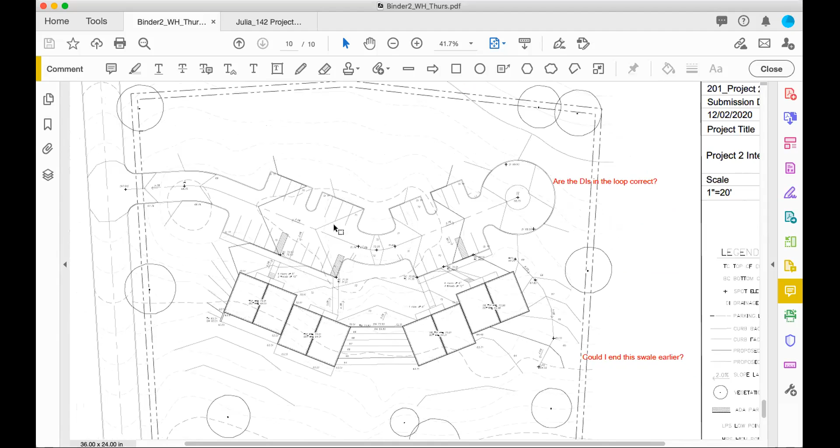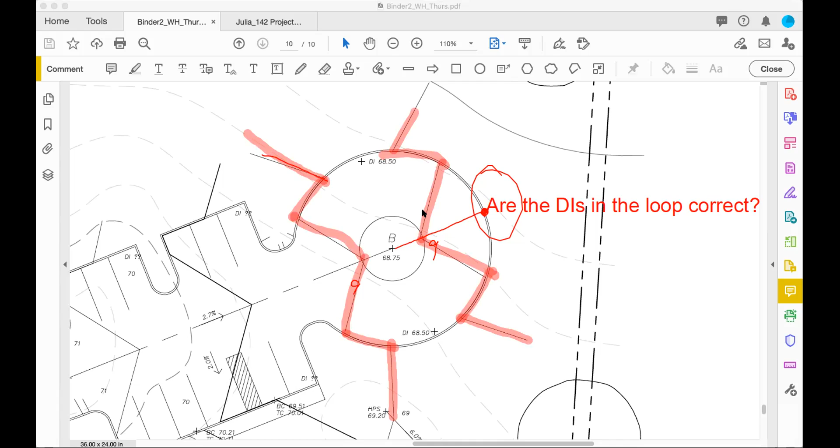I see something questionable here. Let's take a look. So you flipped it, which is actually helping. You don't have to stack as many contours in this area with the flipping. So you have 9 here. You have another 9 here. So we need to know what this is. Oh, okay. So you're connecting 9. You have 2 9s. This one, we're going up to there. So where did you connect it to? Oh, I need to zoom back out a little to see the other contours.

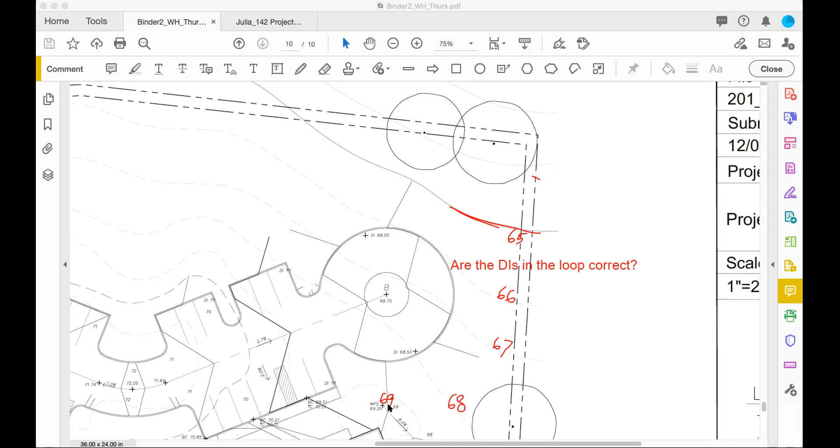I don't think this is. Let me check the contour number. What's the contour number? That is 69. This is 69? Sorry. That's 5, I think. 69 is all the way down right below the first one in the circle, I think. Sorry, they disappeared. Oh, so this is the one. Yeah, this is 5, 6, 7, and 8. That's 9. This is 9. So your 6, 7, 8, 9, it's here. All right, I think so.

That's the 9. So that one connects back here. Okay. And then that hits the wall. Oh, so I need to start connecting those. Yes. It's actually going in this direction. Got it. I am trying to figure out where your 68 is, the other one.

69, the other one goes. It's actually going like this. Okay. It needs to close on itself because the other side closes like doing this. And the way that you calculate this would be, I need to find out what this is. So it's going down and then you have a curb. The curb is likely, let's see.

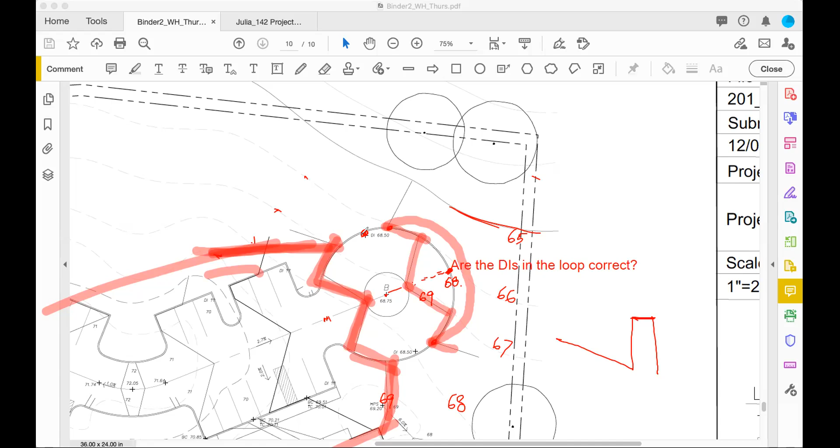No, that's okay. But the contour pattern would look like this with 69 closing on itself, just outside the circle. Because you can sort of draw where I'm going down, then I'm going up again, then I have a little curb, so I'm creating a little bit of this here. For the turnaround area, right? So you have a contour of a little bit of 69 that will wrap around this area and form a little of its own.

So then you have your 68 keep going to hit the wall on the building. And 67, 66 and 65. Do you think that'll fit? I think it will fit. Okay. And then also with grading up top, I wasn't sure how to do the 70, the 71, or the 72. Let's clear this and come back bigger here. You meant this area? Yeah, so do those just meet each other back up then?

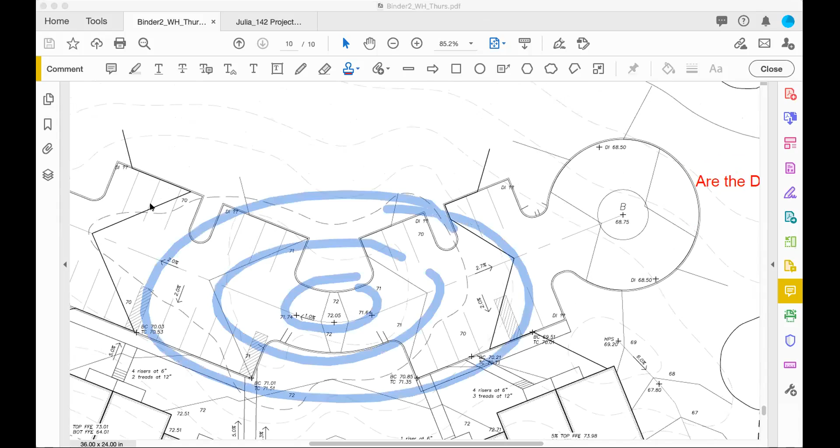No, because remember we had a summit pattern before. Right now it's the same pattern, it just has a very complicated shape now. So my 71 would connect to this 71 like this. So you can see your 71 does something like this, right? And then your 70 would be doing this. Okay, so do they need to follow those points out for drainage on that end? Not really, because water would drain that way anyway. Got it. And then same with the 69 we just did.

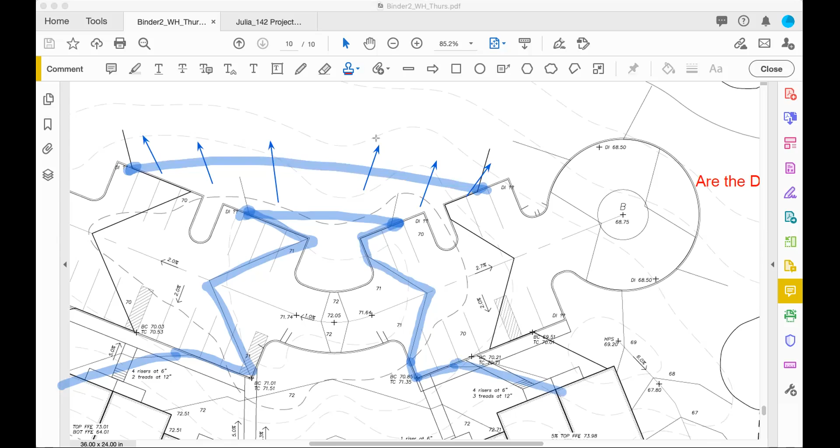Could we maybe do the 69 on the left side? Yeah, the 69 on the left side. You'll need to find where it is. The same thing, you would try to connect. I'm trying to move these away, close my annotation. So here is your 69, right? That's your 69. You would have something just like that. Oh, okay. And one more here.

Which is that one? That's 72, the one in the middle? Yeah. I actually changed that into doing that center diamond like we saw. Even if you do that, you would have 72 on the outside, because you have 71.5 here. So that's corresponding to 72 on the curb, right? So those are not contour lines, but help you connect the center line 71.5 to the 72. Got it. So you have those there.

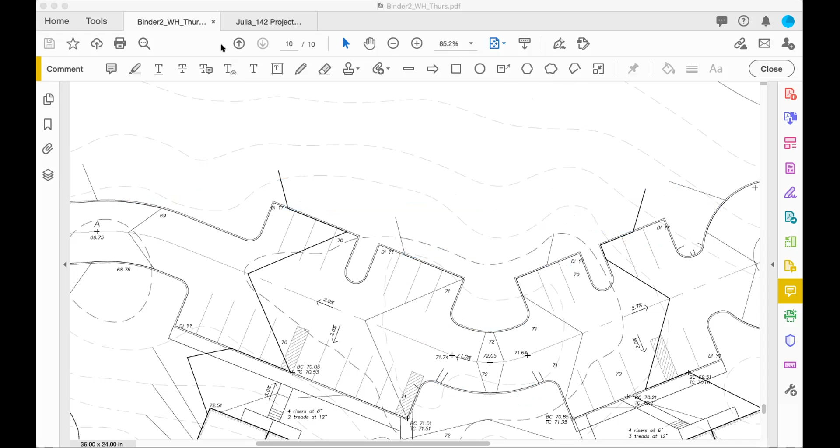Cool. I think if there's any more questions on the page, I might have missed some. I don't know how much time we have. We have another 20 minutes. Oh yeah, I just meant for mine. Feel free to, I think anybody can ask. You can go back to your list, and if you have additional ones, feel free to bring them up. Are there more on the page that I might have missed? Can you just zoom out quick?

So what happens with 72 to the center wall? Only one stairs? Yes, you can have only one stairs. That's no problem, that's actually better. Should the walkway lengthen to the slope behind the wall? We kind of went through that. Could I end the swales early? Yeah, the key thing on the back here is that you need to turn that away. I can't remember if every one of the units has to have a basement. No, this is actually how Stuart told me to fix this one.

But you actually need to turn the contours away, right? The 66 needs to do that, otherwise it's all draining to your wall. So the general pattern is correct, having these contours hit this. But once it hits the wall, it needs to turn, like what Stuart demoed the other day. You need to make sure the corner here is the highest so it drains away. The general direction of these contours is correct to form the swale, but they need to continue to hit the other wall, so it would direct water out of this corner.

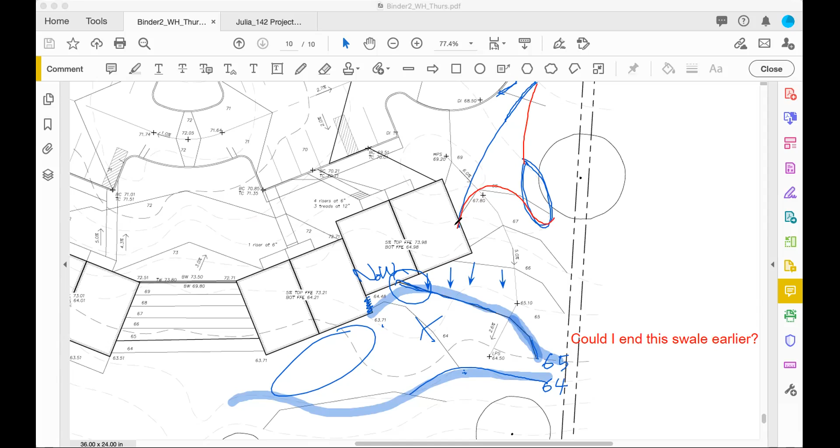Yes, there's a 68 because the first contour out of the drop off on the other side, it's 69. You mean coming out of the side of the turnaround? Yes. Oh, yes, not drop off, turnaround. No, that's totally fine. Okay, it'll come out the back and then just join around the tree into that one. 5, 6, 7, 8. This one. I think it's this one. I don't remember which one. That one's 69, but that one you have connecting on itself. Oh, I see.

This is the one option. The other option is for this to connect back here, and then for this to go up like that. Does that make sense? Okay, so just having it connect twice. Right. If you want to keep that portion, I can do this, or I can close this off and then do that. Those are two ways of working with the tree drip line there.

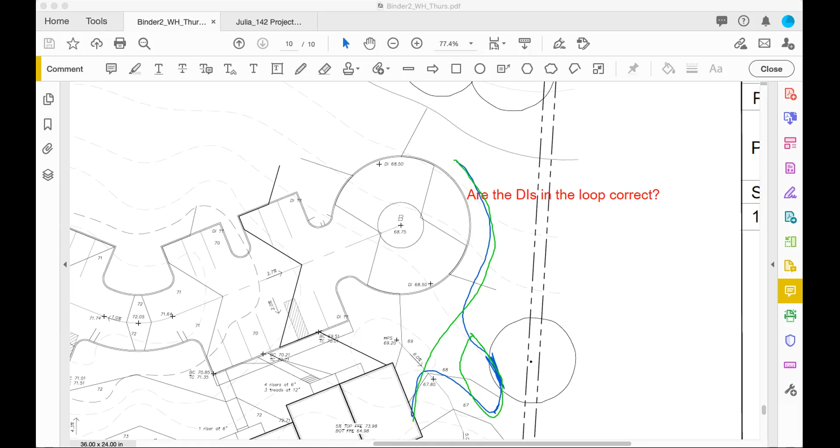Okay, cool. I think that's all my questions. Cool. Thank you so much, this was very helpful. You're welcome. I will now stop share. I would open up to any other questions at this point. We still have 15 minutes.

Yes, I have a question, Ruhong. Yeah, go ahead. I have a PDF, is it okay? Yeah, you can share. Yeah, I will share now.

Okay. So I just wanted to check my TFFEs and BFFEs. I'm pretty sure that they're going to work, and I'm not too worried about contours. But I just wanted to get that checked and make sure it was going to be good, because I think that I'm in a good spot as far as the contours. I'm going to have to move out of the back. And this is a little too low. This should work. Oh, I see why it's too low, because of 63. Yeah, 63. You can't move that.

This is 71, 75. Which one is ADA again? This one? Yeah, I'm gonna make both of those ADA, I thought. Okay. I only need to have one unit that's ADA. Right, one pair. Okay. So if this is ADA, I suspect that this is a little low.

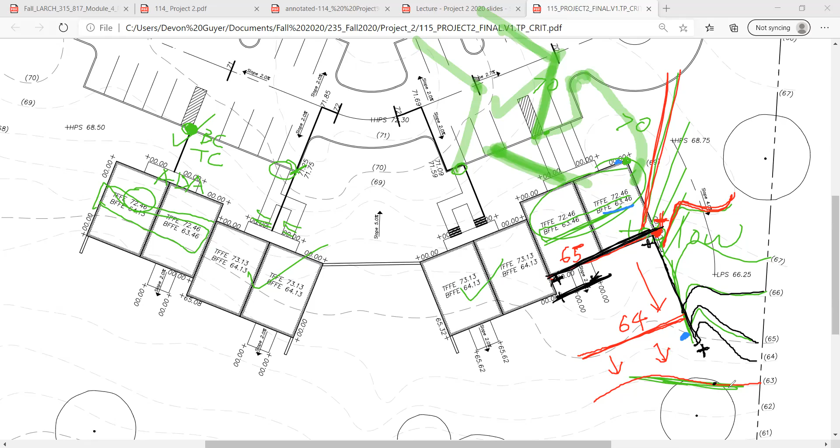And then my last question is about tread. I heard you mention tread. Do we actually have to calculate a 2% tread per stair? Well, I would not ask you to, as long as you have these spots correct, the bottom of the stairs. I need to change the color. So I only included that detail to explain that if you need that extra elevation difference, you can count on the tread to have a slope on the top.

But in reality, when we give our construction drawing to the contractors, we don't need to do that because they are very familiar and good at creating the slope for the treads. What we give them is basically, you have to make sure the BS, the bottom of the stairs, are correct, and give the entire elevation change and the dimensions to them, and they will build the stairs with the correct tread slope. So what you provide is basically the BS and TS here.

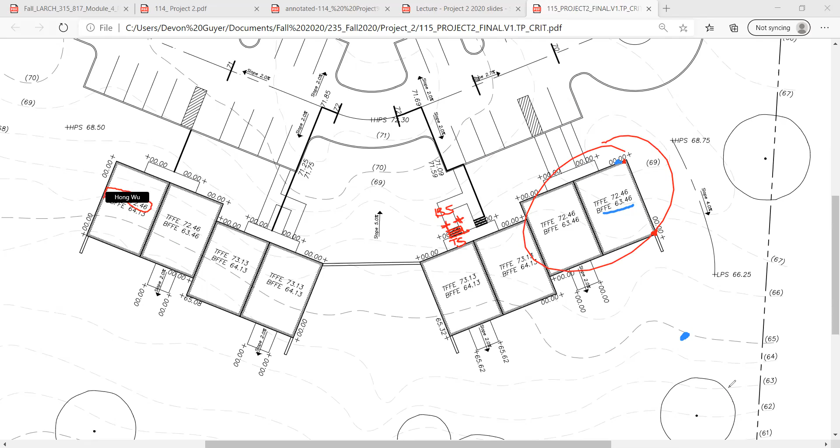Okay, don't worry about calculating the tread slope for every step. I think it's distracting at this point. I don't think you should use that time to do that at this stage. Yeah, so we don't need to calculate the treads and risers. Yeah, give the dimensions of the steps, like we did in exercise 8, I believe. Right. That's enough. Okay, so the only FFE that needs to change is the far right unit then? That needs to change. This needs to be verified, whether or not you can get this high. Okay. Thank you. Okay, cool.